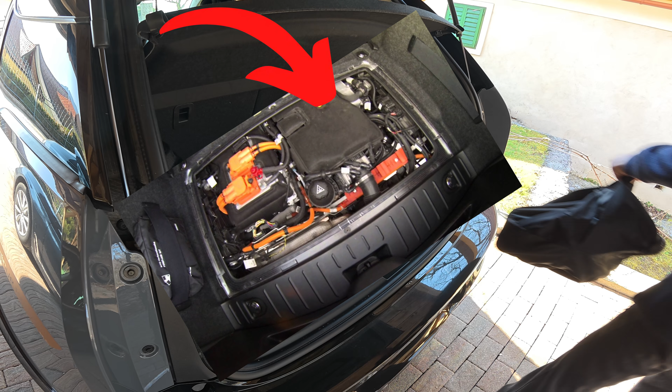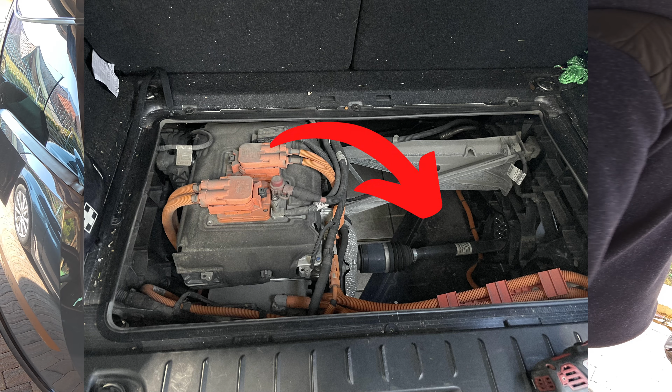Hi, this is my BMW i3, an electric vehicle. You could get it in two options: one with a range extender, which is a little dorky 650cc petrol engine from BMW scooters, or full electric. Mine is fully electric, and BMW decided to put nothing in place of that engine. Because of that, I'm lacking trunk space for my charging cables, so I decided to build my own.

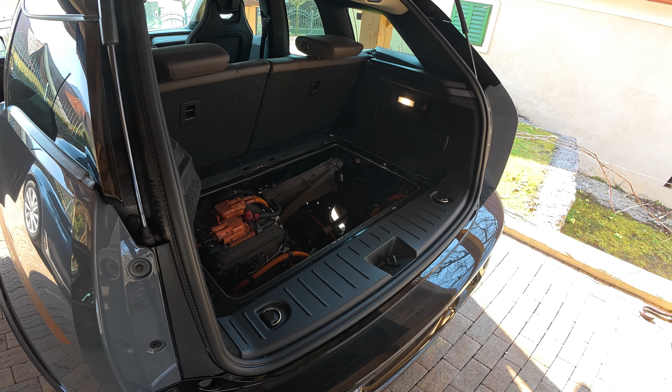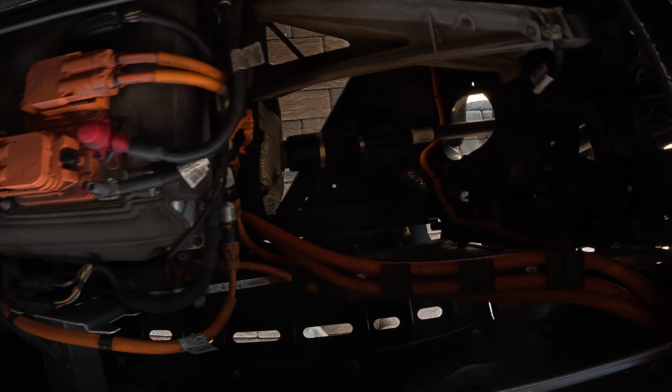So these are the guts of the i3. Oh, what do we have here? A snack. Delicious.

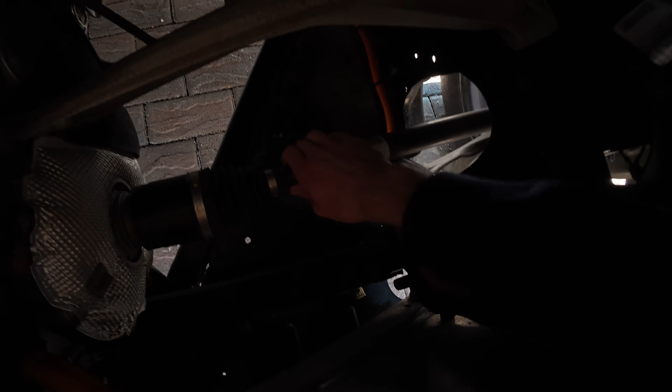Also, oh, that's metal, interesting. And the dinky little drive shaft is like this big.

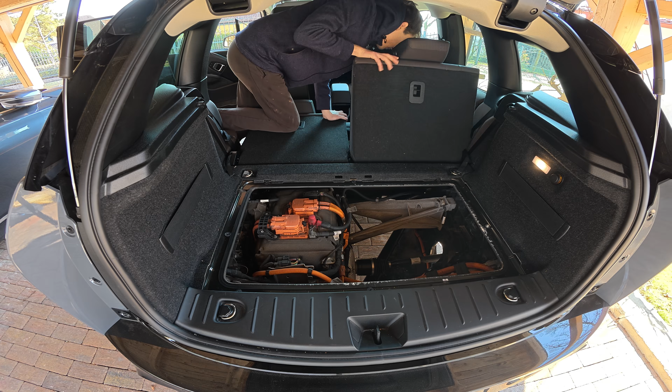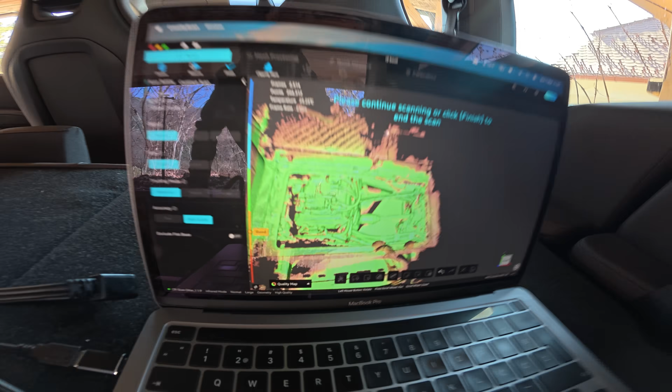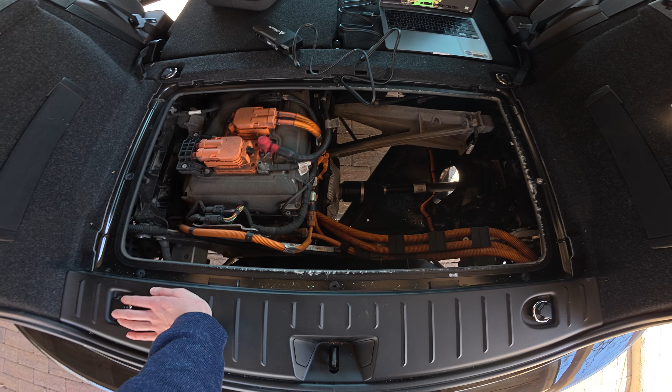Right here you can see me scanning the engine bay, or I mean lack of the engine bay. So as you can see, I scanned the whole thing, and I'm also going to measure the distance between these two and all of the bolts, so I got some references to see how accurate the 3D scan is.

But now we can just finish, and see—damn, it looks good. It's a little messy, but we'll clean that up in software.

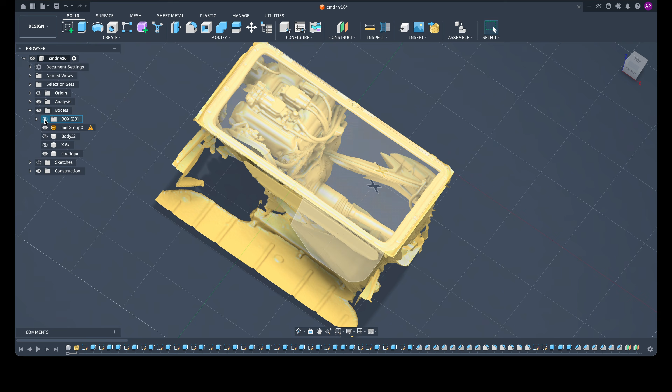So what I created is a little box that fits right inside, and then I cut this box into little 3D printable pieces. You can see them here, and I created little holes in the joints that I'll put 3D printing filament inside to guide me while I glue everything together.